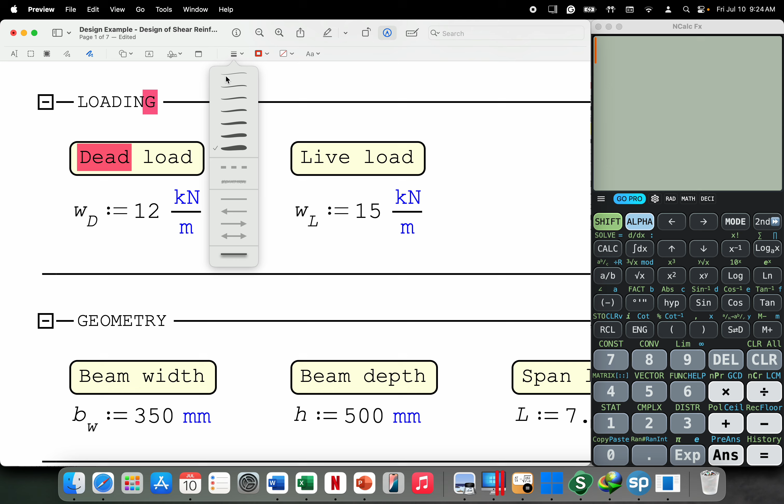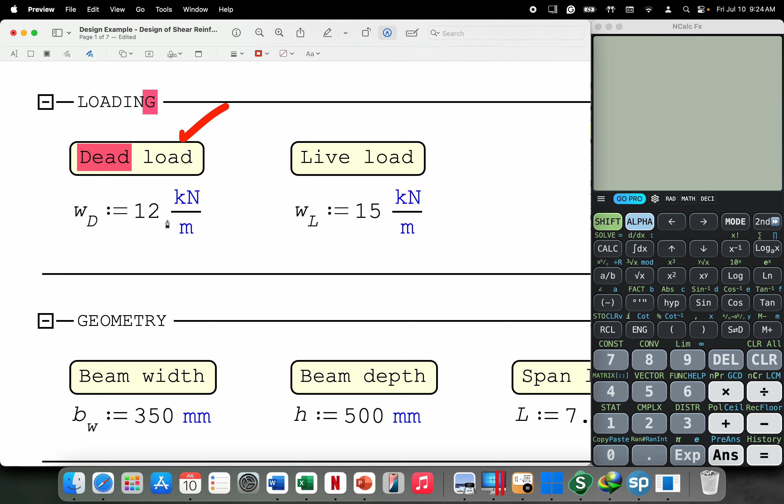So in this design example, given na meron tayong dead load. Take note dito sa dead load, included na dito yung self-weight ng ating beam, so no need to calculate for the self-weight ng beam then i-add pa sa superimpose na dead load. Okay, so next is yung ating live load given na 15 kilonewton per meter.

Ito naman yung geometry. So yung width ng beam is 350, yung beam depth is 500, yung span length is 7.5, tsaka simply supported beam yung ating beam condition.

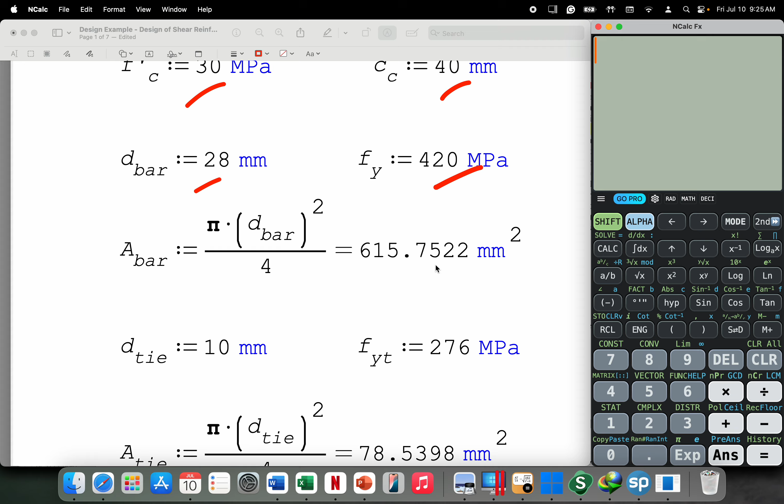So for our material properties, given na yung FC prime natin to be 30 megapascal, the clear concrete cover 40 millimeters, diameter ng aggregate 19 millimeters. Then yung diameter ng longitudinal bar natin is 28 millimeters. Yung yield strength ng longitudinal bar is 420. So therefore yung area ng bar natin, so pi d squared all over 4 lang, is 615.

Yung diameter ng ties or stirrups natin is 10 millimeters. Yung FYT, this is the yield strength ng ating transverse na reinforcement or shear reinforcement, that is 276 megapascal. So yung area ng ating tie or stirrups, pi d squared all over 4, so pi times 10 squared all over 4 will be taken as 78.5398.

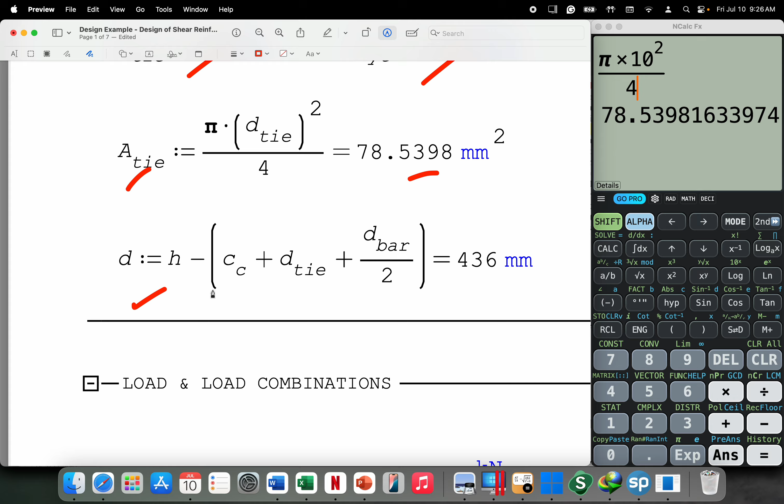And then we have here our effective depth ng ating beam, considering na meron tayong single layer ng ating steel reinforcement. So yung H natin na 500 minus yung C sub C na 40 plus diameter ng tie na 10 plus yung longitudinal bar na 28 divided by 2. So 436 yung ating D.

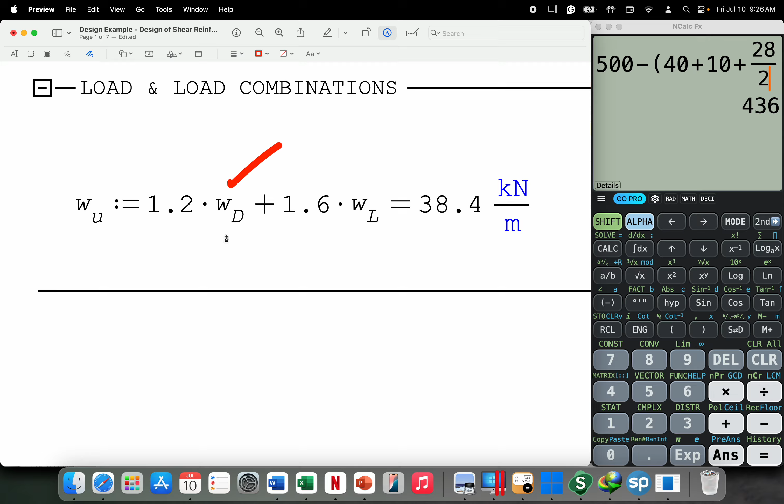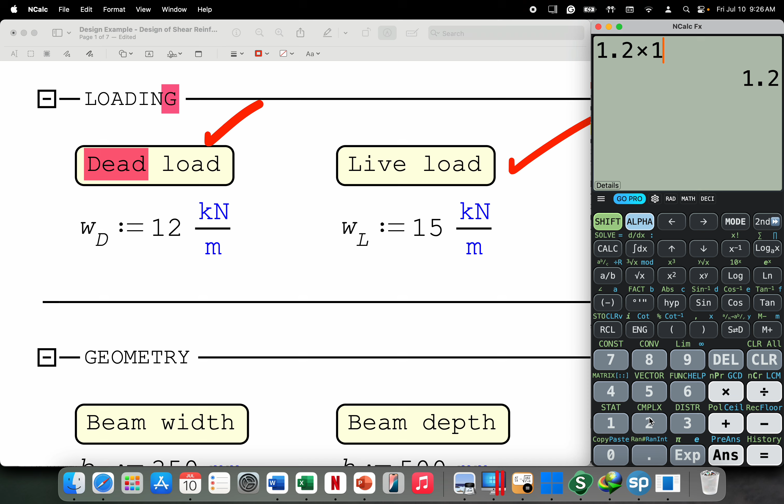After that is to solve for our factored na loading, so gagamitan lang natin to ng load combination. Again, yung given na dead load, included na dito yung self-weight ng ating beam. So gamit yung load combination na 1.2 dead load plus 1.6 live load: 1.2 times dead load na 12 plus 1.6 times yung ating live load na 15. Yung makalculate natin is 38.4.

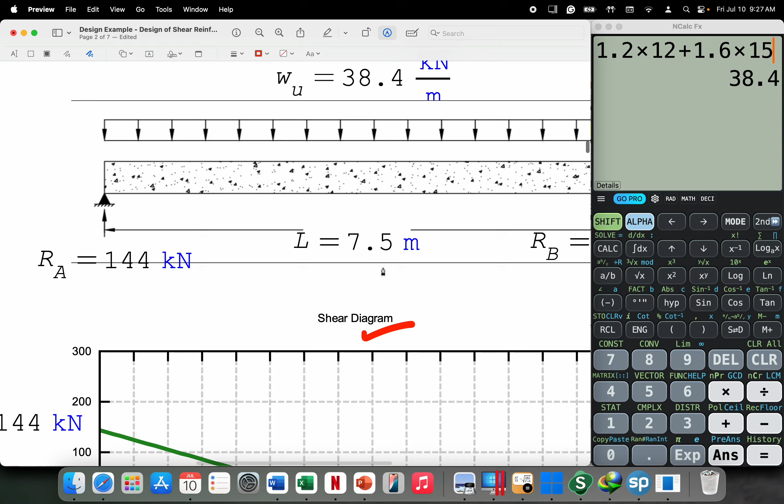After that is to proceed to the structural analysis. So since nagde-design tayo ng shear reinforcement, meaning dito lang tayo mag-focus sa ating shear diagram. But before that, we have to solve muna yung ating mga reactions. Now, to solve for our reactions, pwede na mag-sum up tayo ng moment dito sa point B to solve for RA, or mag-sum up tayo ng moment dito sa point A para masolve naman ng ating RB. Or simply, we're just going to sum up all of our forces vertically, then i-divide na natin sa 2 kasi symmetrical lang naman yung ating loading.

So, 38.4 times 7.5 divided by 2, so yung magnitude ng ating mga reactions for point A and point B is taken to be 144 kilonewton.

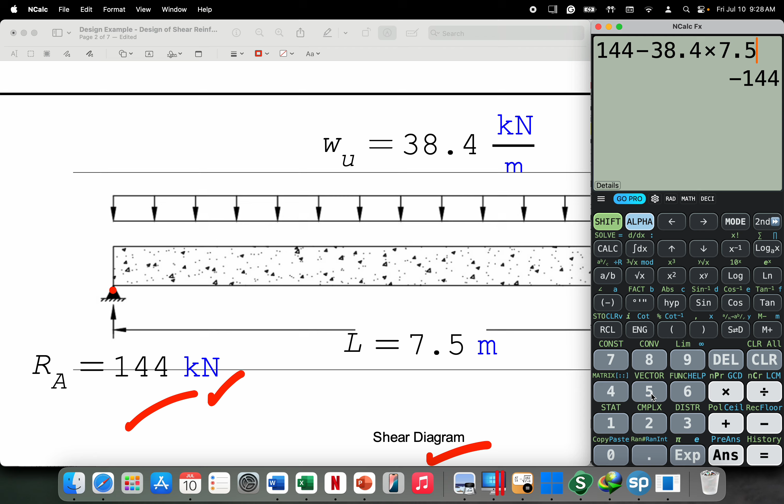After that, we're going to sketch the shear diagram. So at point A, we have a simultaneous increase at a magnitude of 144 kilonewton, kasi meron tayong reaction at point A na 144. 144, babawasan natin to ng load area na 38.4 times 7.5, we'll get a value of negative 144. And then at point B, meron tayong reaction na 144, so sasarado lang yung ating shear diagram. Yung location ng ating zero shear force, since symmetrical lang naman yung ating shear diagram, is taken to be L all over 2.

So take note na itong 144, ito na ngayon yung gagamitin natin na value for our factored shear force na VU. So yung factored shear strength natin or required na shear strength VU shall be taken to be the maximum shear force doon sa ating shear diagram, 144 kilonewton.

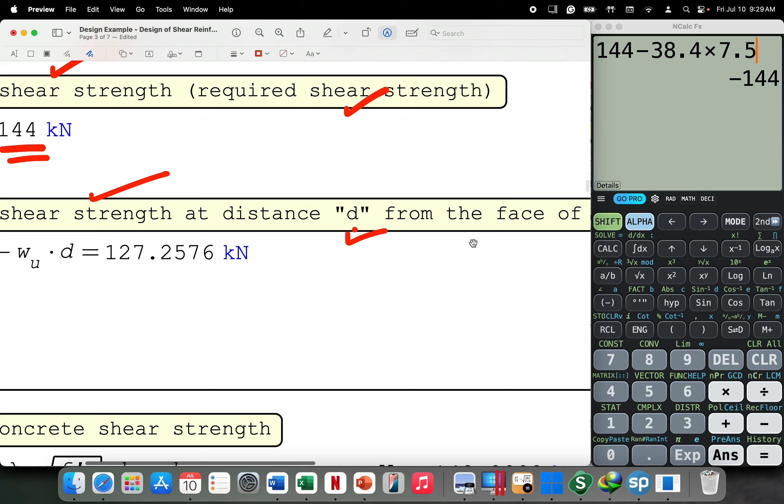After that is yung isolve natin yung factored shear strength at distance D or effective depth from the face of our support. Kakailanganin natin ito mamaya sa pag-solve ng ating shear strength na pinoproduce ng ating shear reinforcement. So to solve, paano nakuha itong 127? Balik lang tayo sa ating shear diagram. So 144, babawasan lang natin ng load area na 38.4 times yung effective depth natin na 436. Pero since naka-millimeters ito, i-divide pa natin to sa 1,000. So we'll get 127.2576.

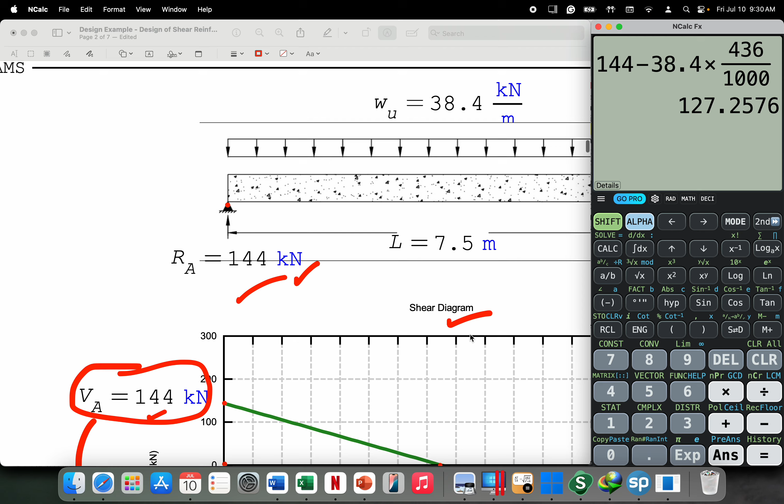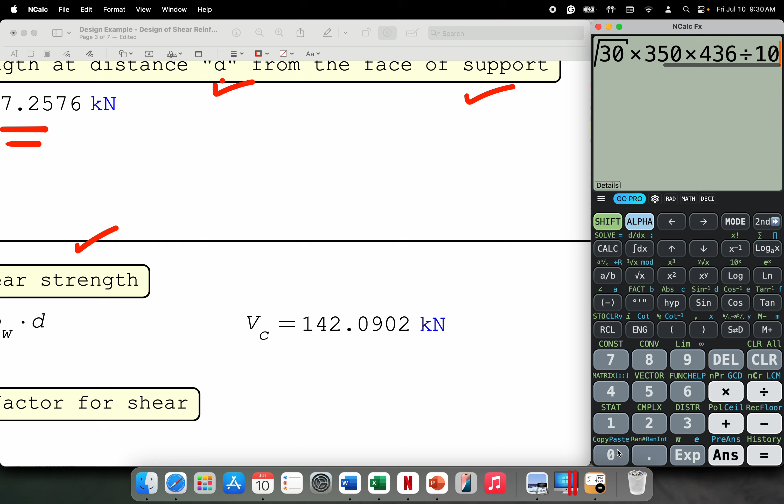So after that is to solve for our nominal concrete na shear strength: 0.17 lambda, the square root of our FC prime, BW times D. So 0.17 times yung lambda natin na 1, since normal weight lang naman yung ating concrete. Based sa NSCP, yung lambda shall be taken as 1. Square root of FC prime 30 times yung ating BW na 350 times yung effective depth natin na 436. So yung makalculate natin, the VC is in terms of Newton, so we still have to divide this by times 10 to the power of 3 para ma-convert sa kilonewton.

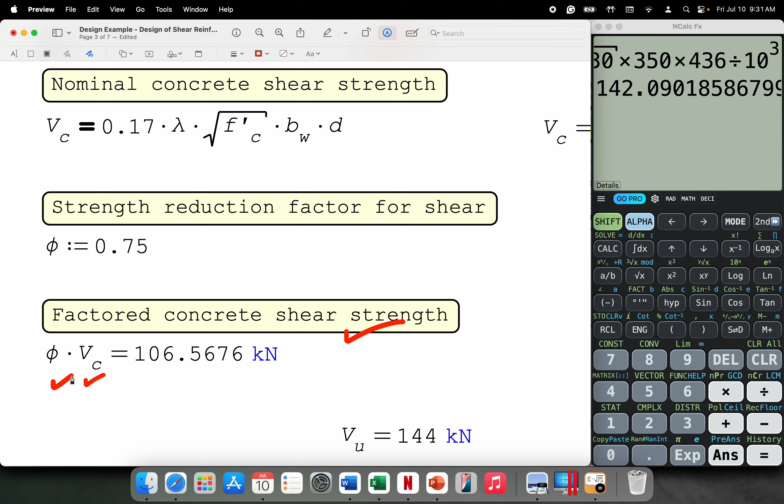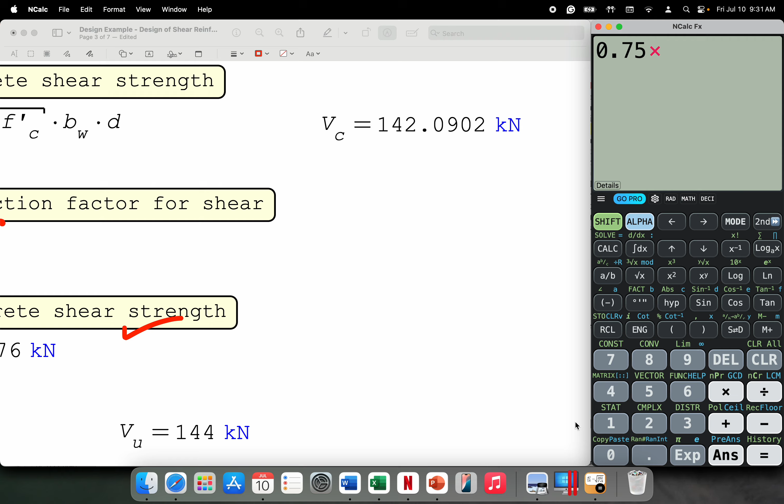We'll have 142.0902. After nito is to solve for the factored na concrete shear strength. So yung V sub C na nasolve natin kanina, we just have to multiply it by the strength reduction factor na phi, which is taken to be 0.75 based sa NSCP. So 0.75 times yung V sub C natin na 142.0902, so yung makalculate natin is 106.5676.

After that, we're going to compare yung V sub U sa ating phi VC all over 2.

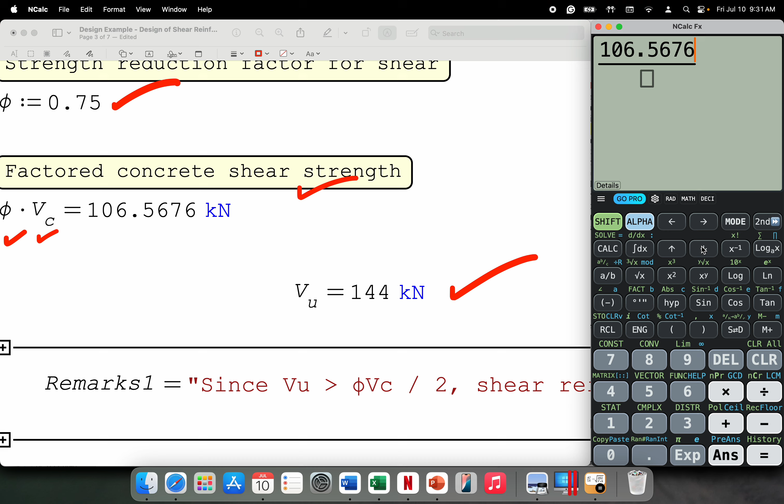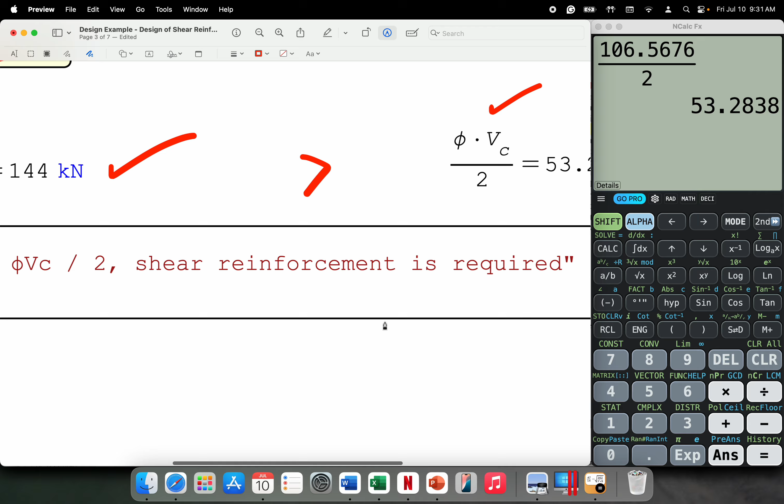So if we're going to check yung phi VC all over 2 natin, 106.5676, i-divide lang natin ito sa 2. So yung makalculate natin na value is 53.2838. Since yung VU natin is greater siya sa phi VC all over 2, meaning yung shear reinforcement natin is required. So meaning, magde-design pa tayo ng stirrups kasi hindi enough yung cross-section tsaka yung mga properties ng ating concrete to resist our factored shear force na VU.

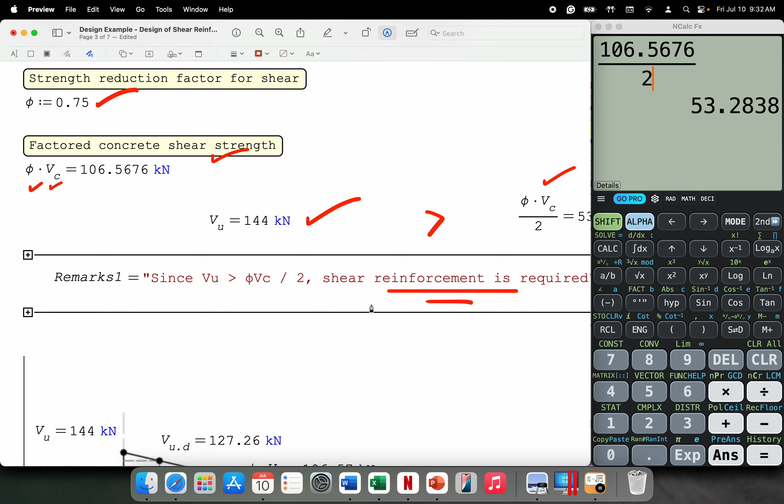So kinakailangan na meron itong mga stirrups. So ito na ngayon yung illustration ng ating shear diagram kung saan na pinapakita yung VU, VUD, ϕVC, tsaka yung ϕVC all over 2. So as you can see here in our diagram, ito yung ating VU, 144, tsaka yung factored shear force at distance D from our support is 127.26. Ito naman yung ating factored na nominal shear strength ng ating concrete, 106.57. Tsaka yung ϕVC all over 2 naman to be 53.28.

Mamaya, we're going to solve itong value ng X kasi ito yung length na kung saan maglalagay tayo ng stirrups. Kasi beyond this point, beyond sa ϕVC all over 2, dito na portion, theoretically, hindi na kailangan ng stirrups. So proceed tayo sa next step.

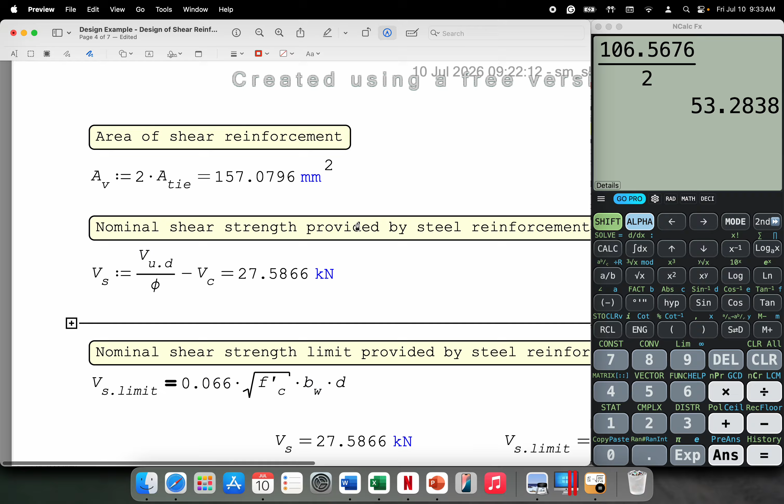We're going to solve for the area ng ating shear reinforcement. So this is equivalent to 2 times ang area ng ating stirrups or ties. So the question here is bakit nag-times 2? Kasi typically, if this is the cross-section ng ating beam, meron tayong dalawang legs dito ng ating stirrups para i-resist yung ating shear force na VU. So that's why times 2 yung ginamit dito.

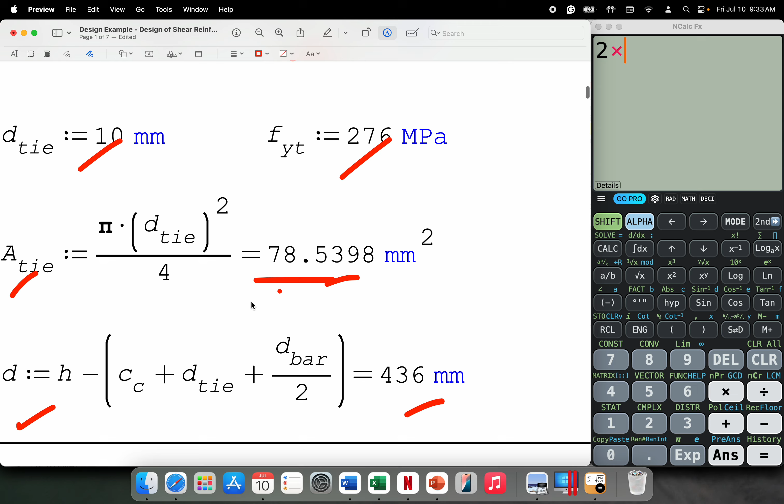So if we're going to review yung area ng tie natin, so 2 times area ng tie or stirrups, this is taken to be 78.5398.

After dito is to solve for the nominal shear strength provided by the steel reinforcement. Ito naman yung ating equation. So V sub S, this is equivalent to the factor shear force at distance D from the support divided by yung phi natin na 0.75 minus yung V sub C.

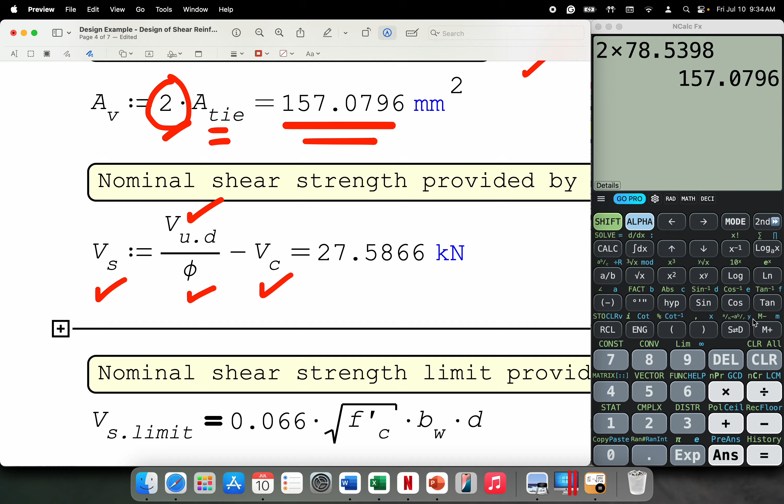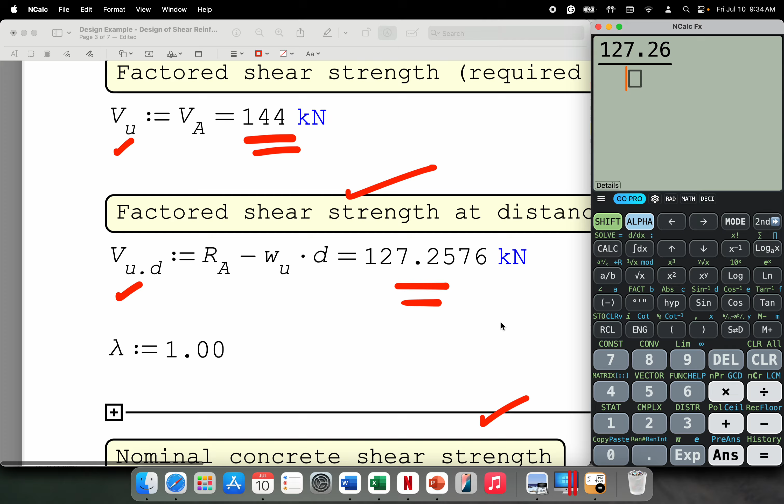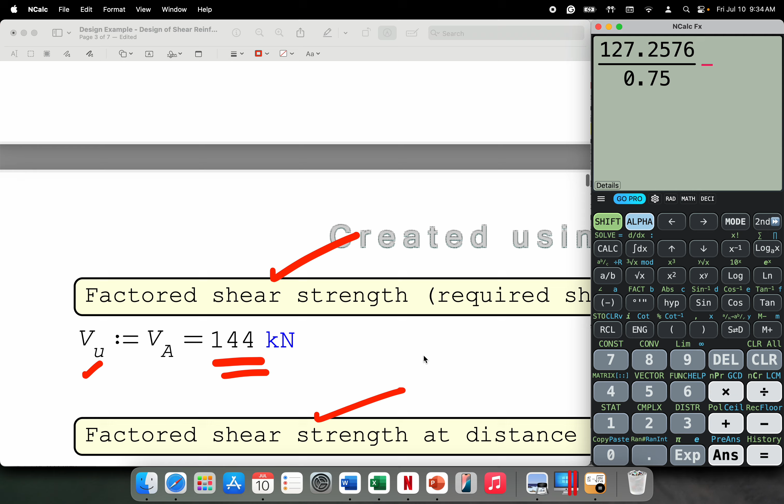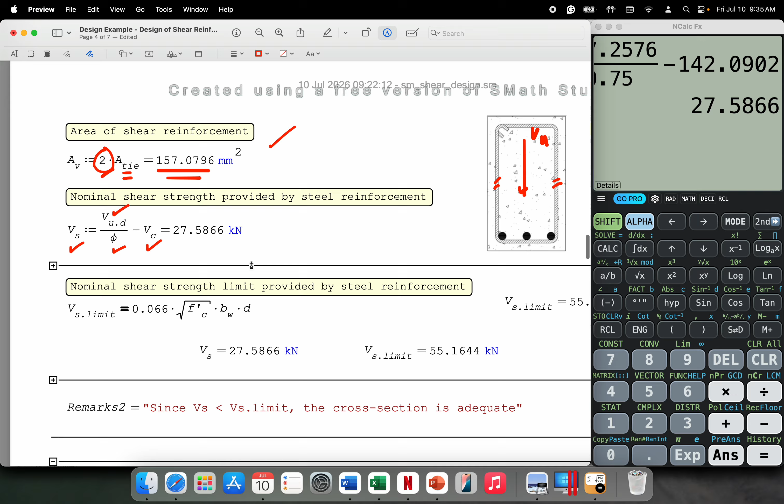So factor the shear force at distance D from the support is taken to be 127.26 divided by, gawin kong apat na lang, 2576 divided by 0.75 minus yung V sub C na 142.0902. So we'll get 27.5866.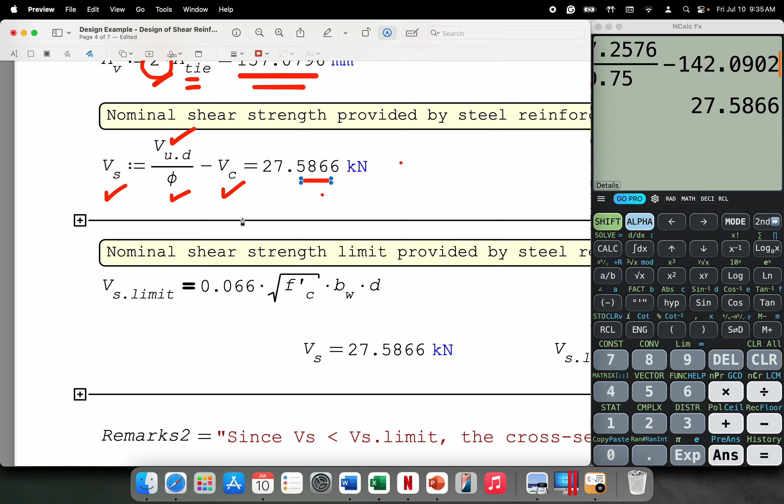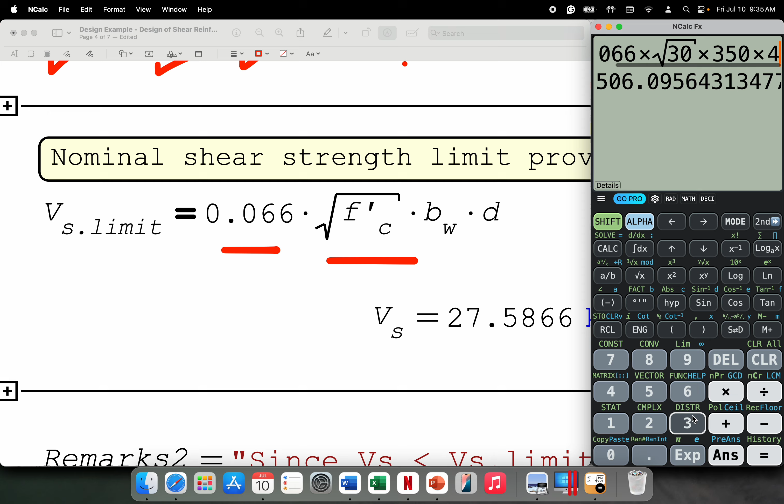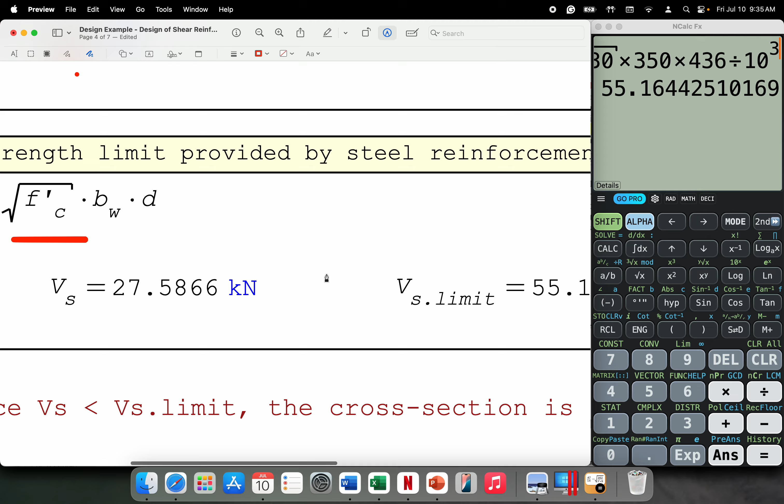So based sa NSCP, meron limit yung nominal na shear strength provided by our steel reinforcement. And this equation is equivalent to 0.066 the square root over FC prime BWD. So kung isosolve natin manually ito, 0.066 times the square root of FC prime na 30 times BW na 350 times 436. Yung makalculate natin, divide na lang natin sa 10 to the power of 3 is 55.1644. Since yung VS natin is less than siya sa limit na 55 kilonewton, meaning yung cross-section ng ating beam is adequate.

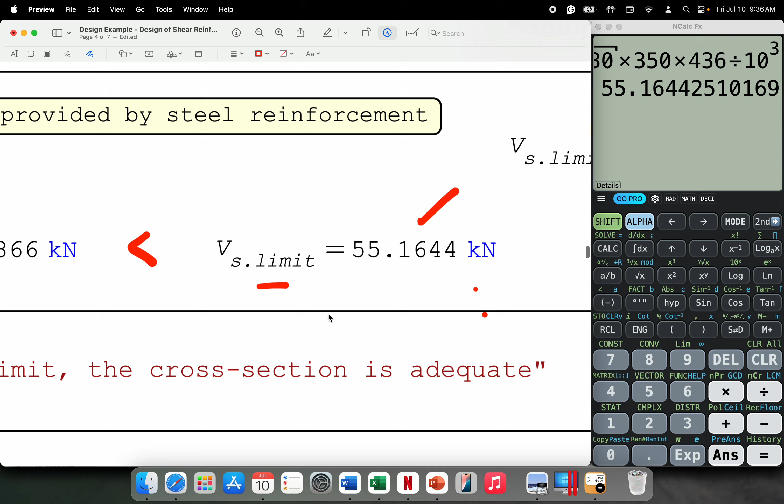So sakali naman na yung VS is greater than our VS limit, meaning hindi adequate yung cross-section. So meaning you have to revise it para masatisfy natin yung condition na ito based sa ating NSCP or ACI.

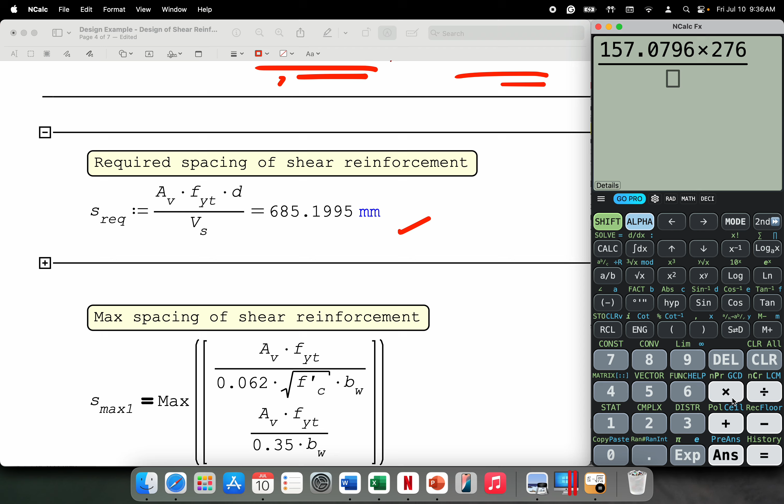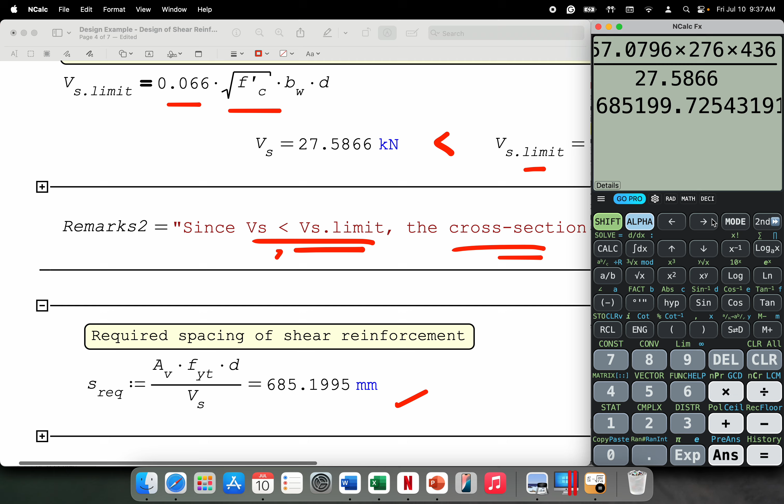After that is to solve naman for the required spacing for our shear reinforcement. So yung area ng ating shear reinforcement AV is 157.0796 times yung FYT. So yung FYT natin is 276 times yung D na 436 divided by yung VS na 27.5866.

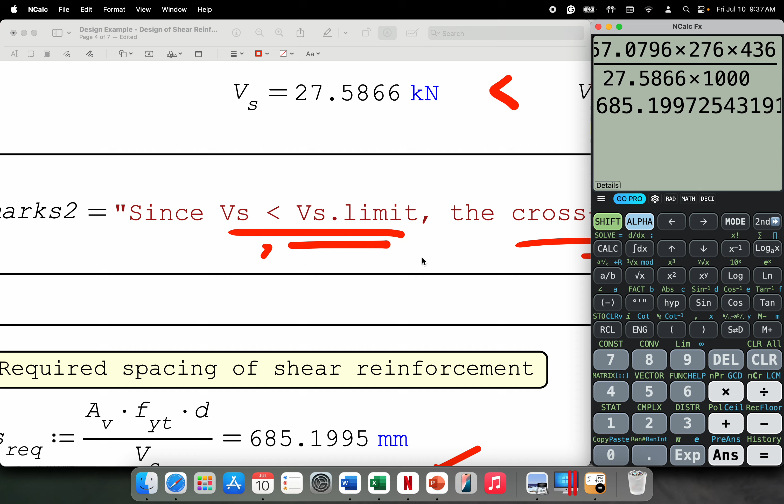So divide na lang natin to sa times 10 to the power of 3. So we'll get a, sorry, dapat naka-ano kasi ito, naka-Newton yung ating shear force na 27. So mag times 1,000 na lang ako dito para ma-convert siya sa Newton. Yan. So we'll get a value of 685.1995. Now, itong required spacing natin na ito, i-compare natin to sa dalawang equation ng maximum spacing.

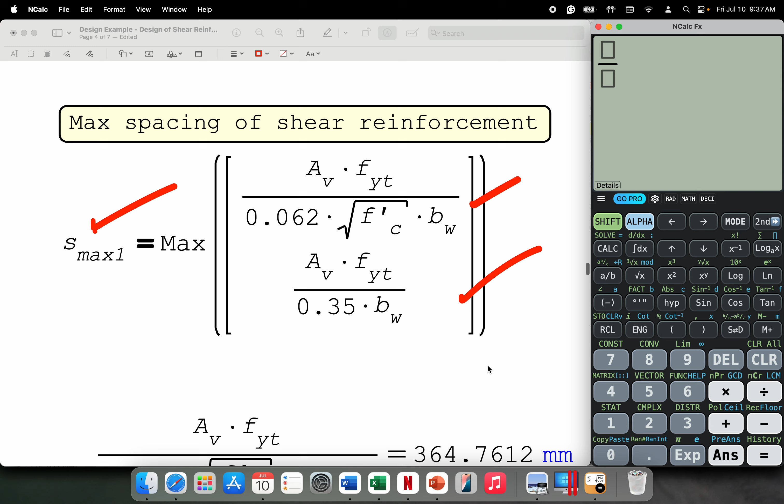So yung first equation is ito, S max 1 is the maximum value between these two equations here. So if we're going to compare, yung A sub V is 157.0796.

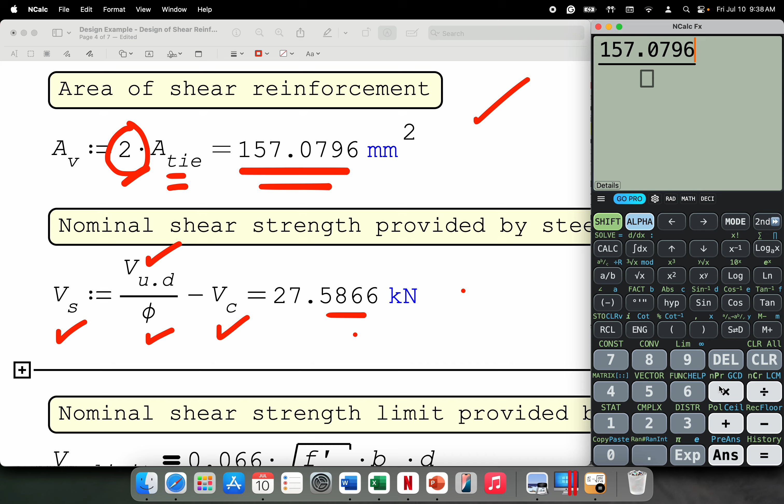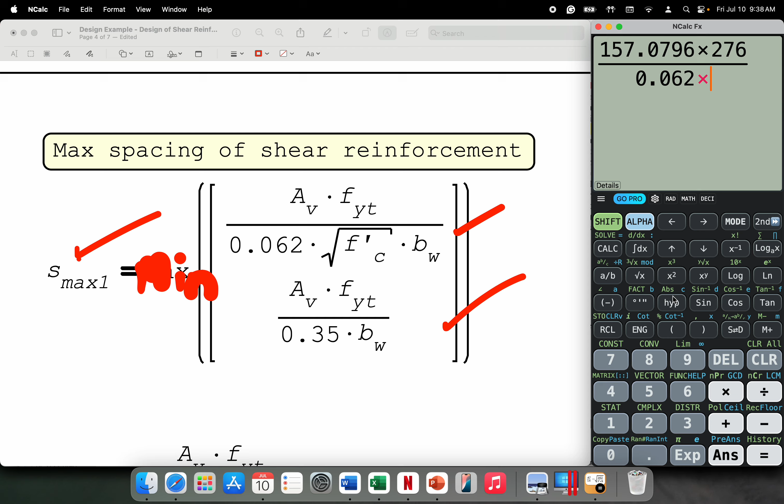Oh, sorry, this is not maximum, but rather the minimum ito. Paki-change na lang sa inyong mga copies. Minimum. So, 157.0796 times yung FYT natin na 276 divided by 0.062 times the square root of our FC prime na 30 times yung BW na 350. So we'll get a value of 364.

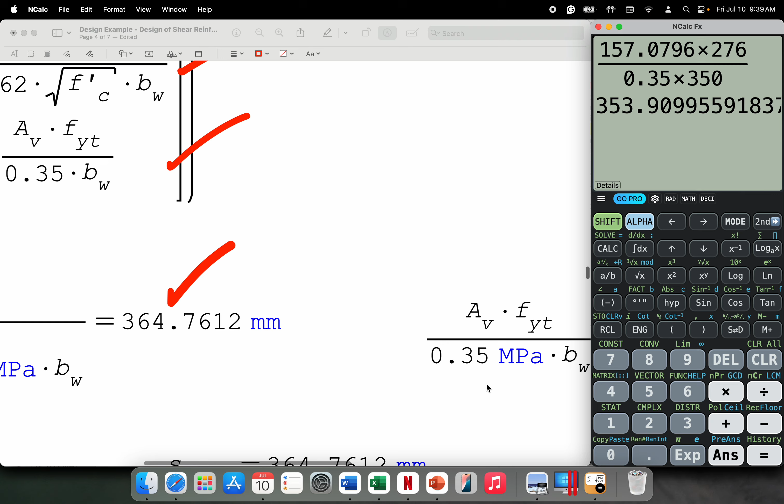And then, yung sa second na equation, change na lang natin yung divisor by 0.35 times yung BW natin na 350. We'll get 353. So the minimum value between these two, ito yung mag-govern. So dito meron ditong mali. This should be 353.91 millimeters. So ito yung sa first na equation.

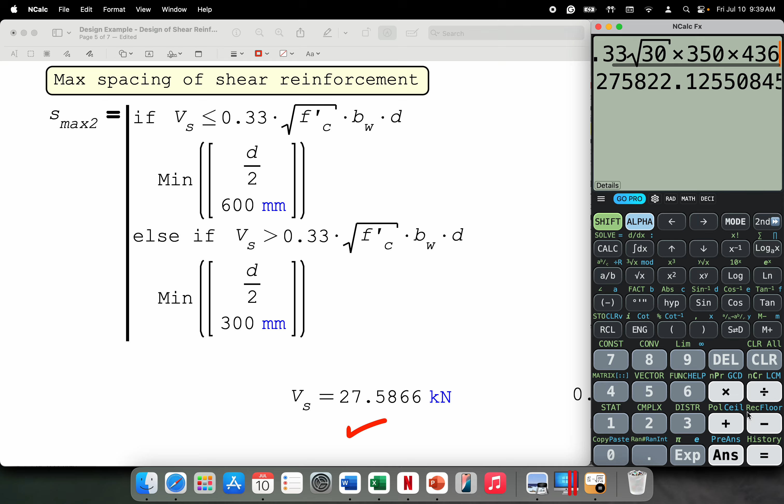Then i-compare natin to sa ating second equation ng maximum spacing. But for that, we have to compare yung Vs tsaka 0.33 the square root over Fc prime bw d. So based on sa previous natin na calculation, yung V sub S is 27.5866 tsaka yung 0.33 the square root of Fc prime na 30 times 350 times 436 divided by 10 to the power of 3 is taken to be 275.8221 kilonewton. Since less than siya, meaning yung mag-govern na equation dito is ito.

This is the minimum between these two equations, d all over 2 tsaka 600 millimeters. So yung d natin, di ba, is 436. If we're going to divide it by 2, yung value nito is 218.

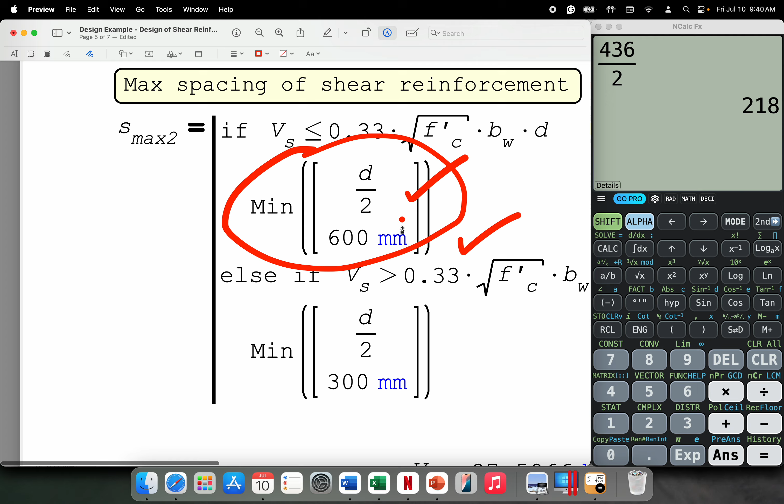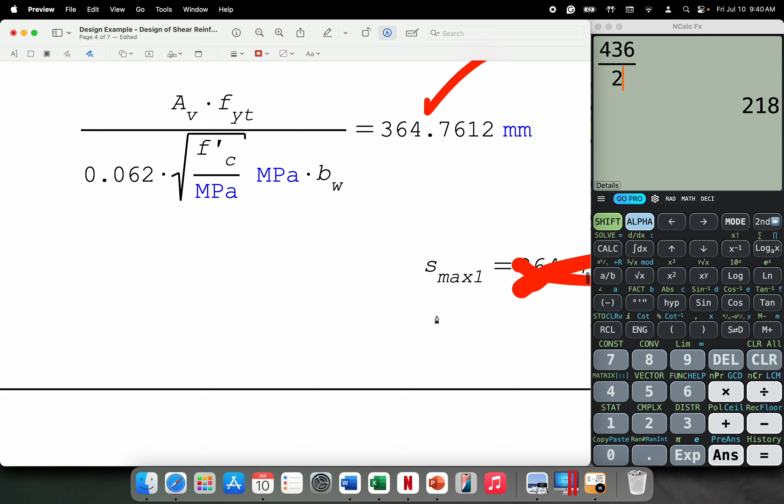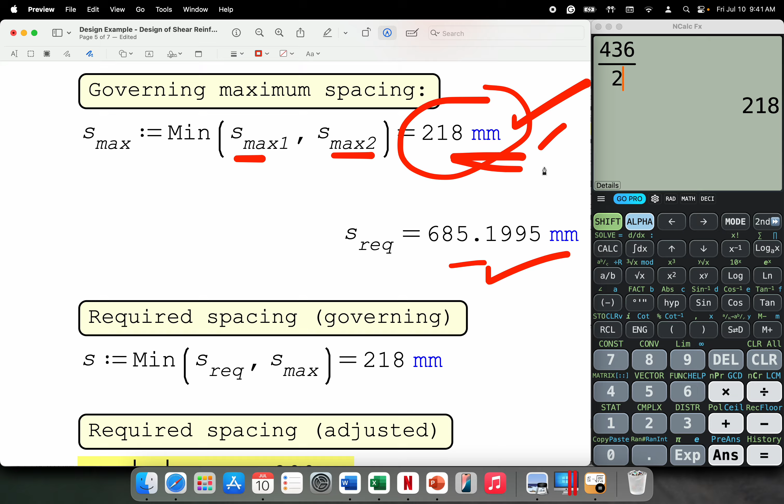Ko-compare naman ito sa 600. Siyempre, ang minimum ay yung d all over 2 na 218. Ibig sabihin, ang mag-govern na maximum spacing natin sa second equation ay 218. After that, icocompare natin ang S max 1 at S max 2 - kung saan ang minimum, yun ang mag-govern na maximum spacing. Ang S max 1 natin ay 353, habang ang S max 2 ay 218. Kaya ang mag-govern ay 218. Ito ngayon ang icocompare natin sa required na spacing na na-solve previously. Dahil ang S required na 685 ay mas mataas kaysa sa S max na 218, ang mag-govern ay ang maximum spacing, dahil dapat ang required na spacing ay hindi lalampas sa maximum na spacing. Kaya ang mag-govern ay 218.

Pagkatapos nito, based sa actual, usually nira-round down natin ito by 50 millimeters. Kaya instead of 218 millimeters, kung i-round down natin by 50 millimeters, ito ay magiging 200 millimeters. Ito na ngayon ang gagamitin nating value para i-check o i-investigate ang capacity ng ating shear reinforcement.

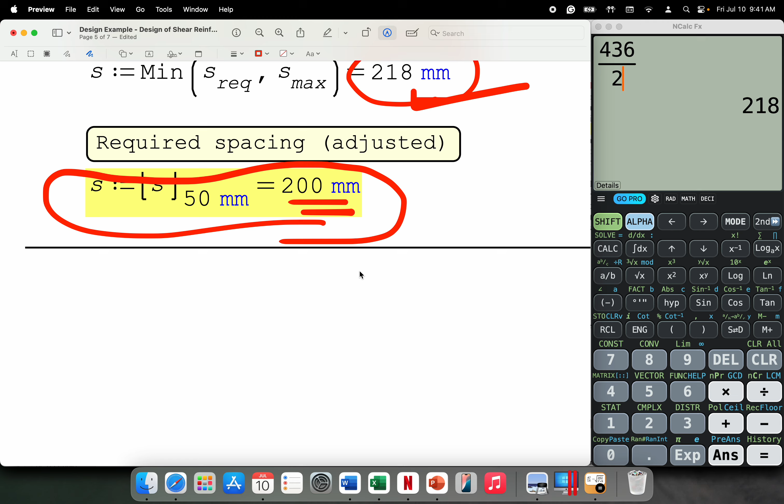Investigation na tayo - solve na natin ang phi VN o ang design shear capacity ng ating beam. Ang equation natin ay phi VN equals phi VS plus phi VC. Gamit ang equation ng VS: VS equals AV times FYT times D all over S. Pero take note, ang spacing na gagamitin dito ay ang adjusted na - ang 200 ang gagamitin natin. Isusubstitute natin ang equation na ito sa equation natin para sa VS.

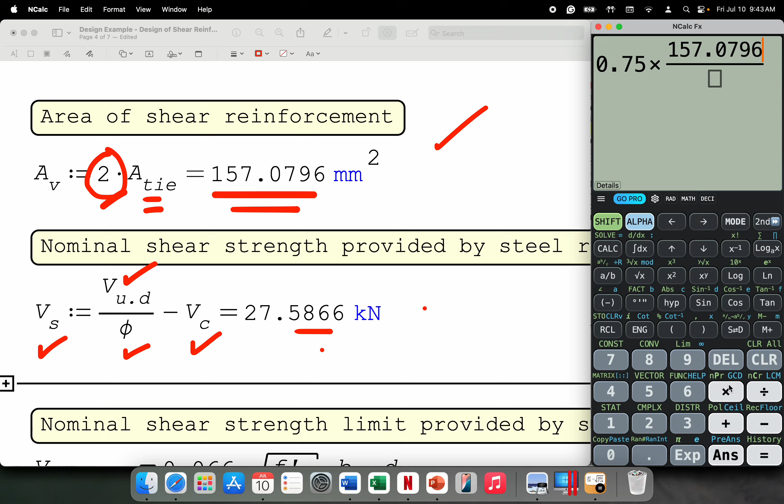Ang phi natin ay 0.75 times ang AV, na 157.0796, times ang FYT na 276, times D na 436, over S na 200, plus phi VC. Ang phi VC natin ay 106.5676. Hahatiin natin ito, times 10 to the power of 3 para ma-convert sa Newton, o sa kilonewton.

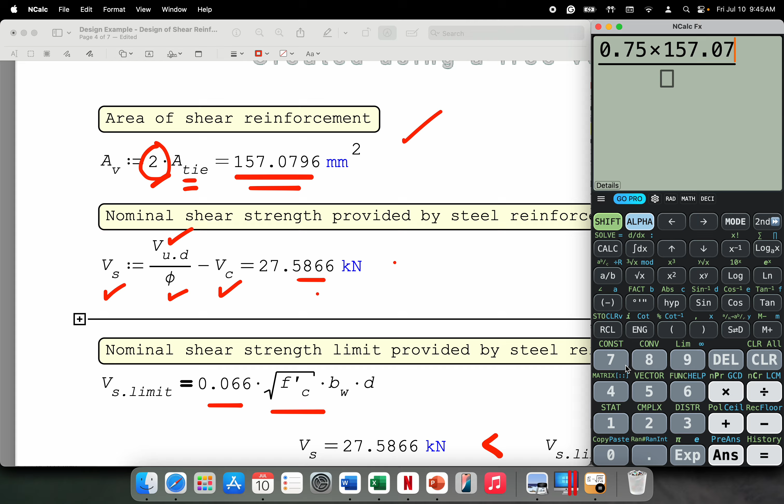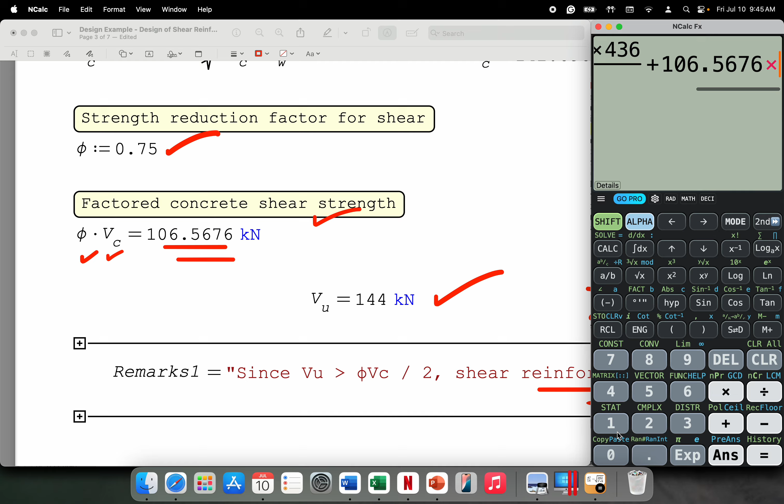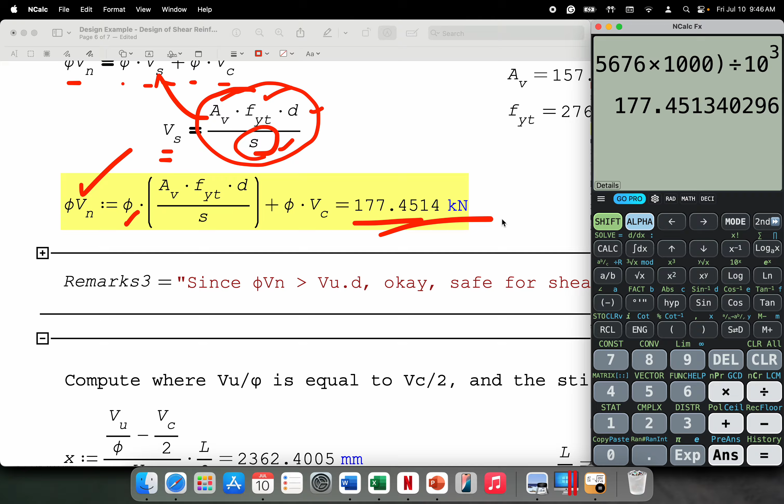Bakit mali? Let me check. 0.75 times AV times FYT - dapat ba may parenthesis dito? Let me double check. 0.75 times 157.0796 times FYT na 276. Ang D natin ay 436, at ang spacing ay 200, plus phi VC na 106.5676. Mag-times tayo ng 1,000 dahil naka-kilonewton ito. Ang value ng phi VN ay naka-Newton, kaya hahatiin pa natin ito by 10 to the power of 3. Ang value ay 177.4514, dahil naka-kilonewton na ito.

Kung icocompare natin ito sa VU at distance D from our support, na 127 lang, dahil ang shear strength capacity natin ay mas malaki kaysa sa factored shear force at distance D from the support, ibig sabihin safe for shear ang na-design nating shear reinforcement.

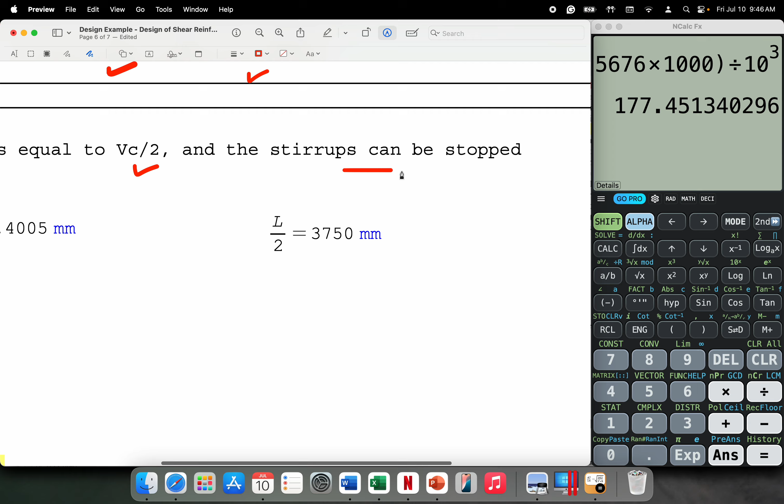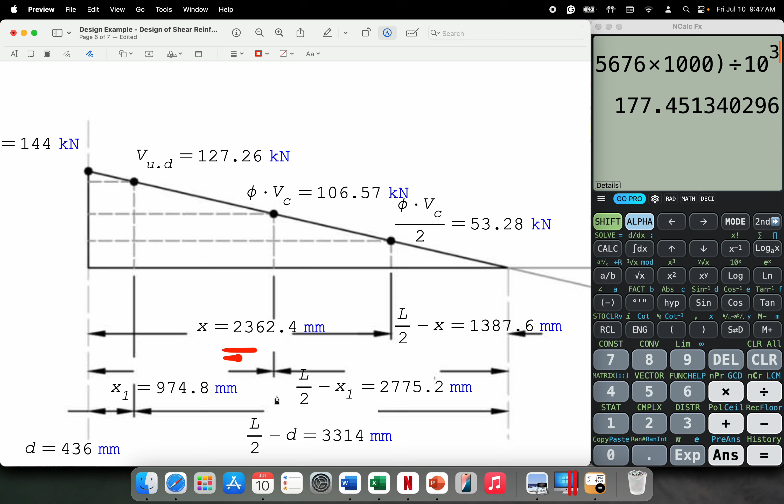Pagkatapos nito, icocompute natin kung saan ang VU natin ay equivalent sa VC all over 2, kung saan pwedeng itigil ang stirrups. Ang distance x natin, take note, ito ang distance kung saan maglalagay tayo ng stirrups, dahil beyond that, hindi na kailangan ang mga stirrups. Ang equation: VU all over phi minus VC all over 2, divided by VU all over phi, times L all over 2. Ang VU natin ay...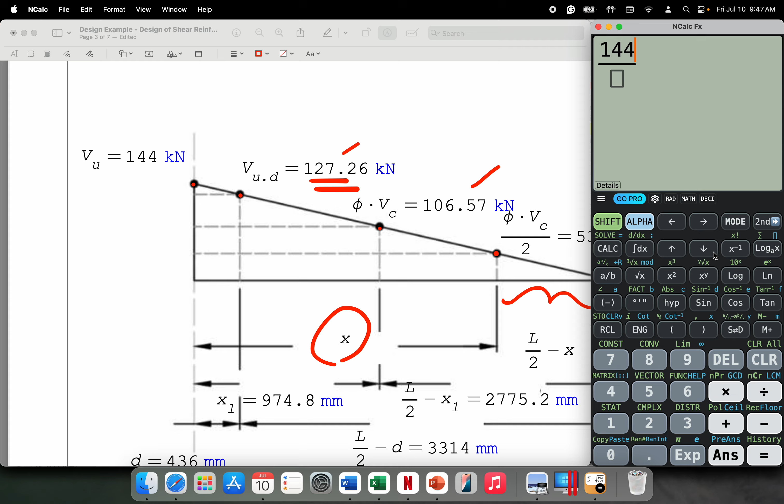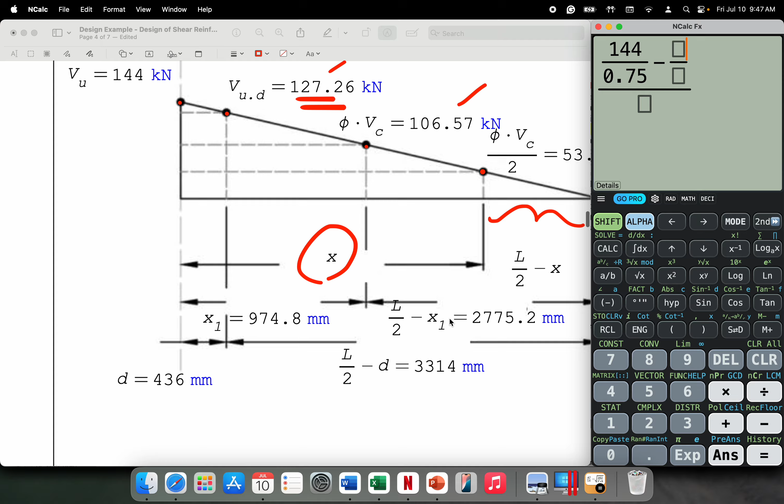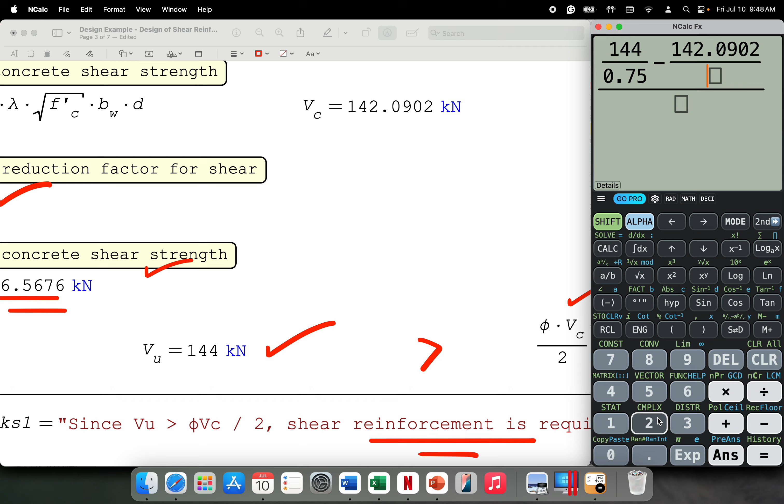Balikan natin ang VU, 144. 144 divided by 0.75, minus ang VC all over 2. Ang VC ay 142.0902 divided by 2, divided by VU all over phi, na 144 divided by 0.75.

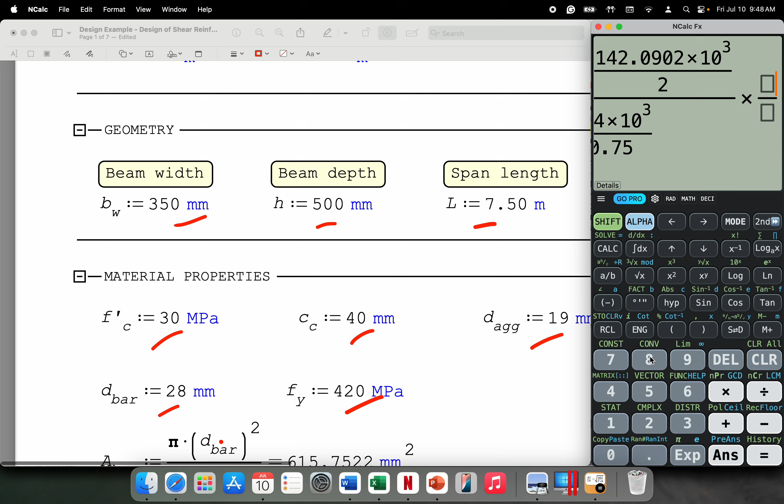Naka-meters ito, kaya pwede tayong mag-multiply ng times 10 to the power of 3, times L all over 2. Ang L natin ay 7.5, mag-times tayo ng 10 to the power of 3 para ma-convert sa millimeters, divide by 2. So meron tayong 2,362.4005 millimeters - ito na ngayon ang distance kung saan maglalagay tayo ng stirrups.

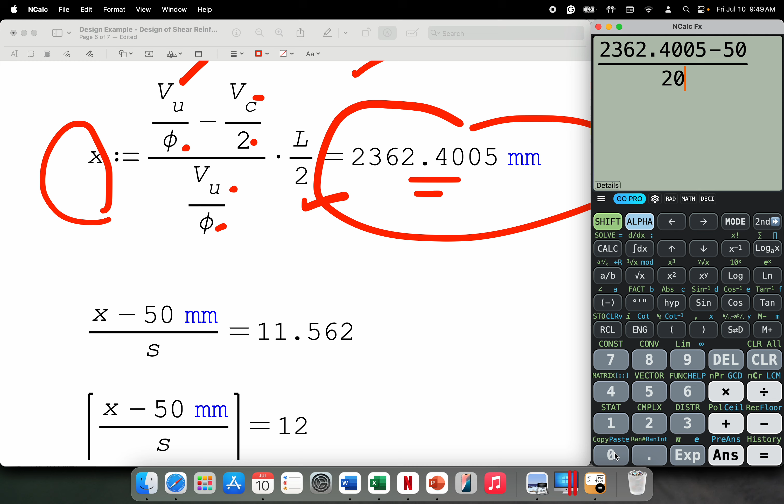Para i-solve ang number of stirrups, ito ang ating equation. Ang mag-start na first stirrups natin ay sa distance na 50 millimeters from the face ng ating support. Ito ang naging equation: x na 2362.4005, babawasan ng 50, divided by ang spacing na 200. Kung i-adjust natin ito, magiging 12. 12 plus 1 ay 13 - ito na ngayon ang ating number of stirrups.

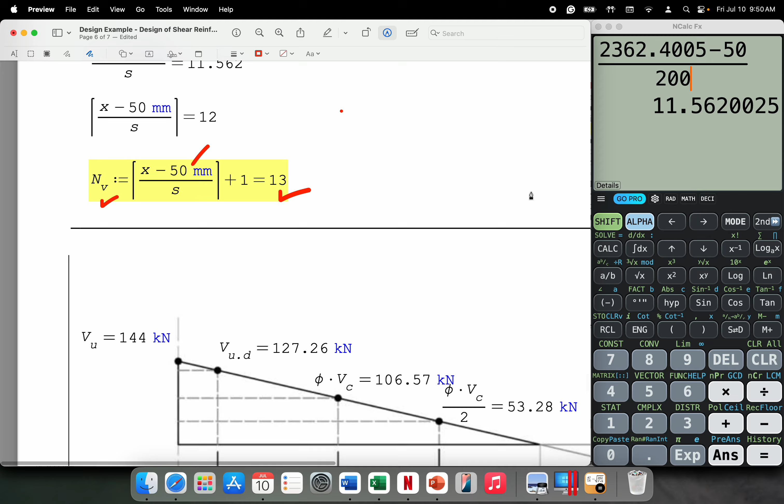Ito na ngayon ang ating shear diagram kung saan naipakita ang mga values ng shear forces at ang mga distance. At ito naman ang detail ng ating transverse reinforcement o shear reinforcement. Ibig sabihin, sa distance x na ito, meron siyang 13 stirrups na ang diameter ay 10 millimeters, at ang spacing ay 200 millimeters. Sa distance mula sa support, ito ay 50 millimeters, pero sa mga succeeding na spacing, tig-200 millimeters na. Ito ang ating detailing ng stirrups sa left side at right side.

That ends our discussion for design of shear reinforcement or stirrups sa ating reinforced concrete beam.